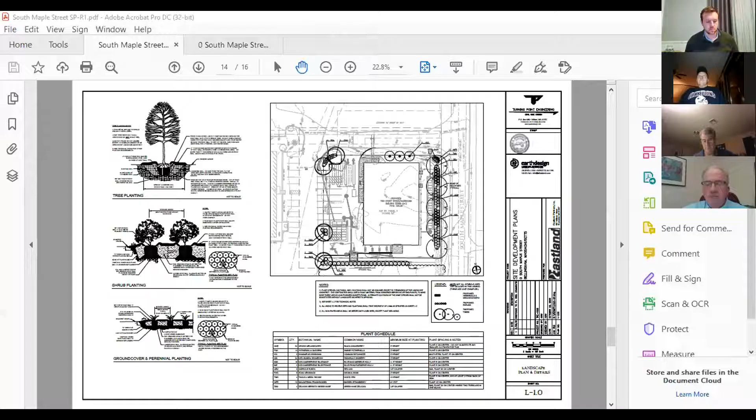Yeah, Stephen, do you have the plan handy? Could you share the screen and walk the board through that? Sure. Okay, everybody see that? I'm just going to go to the layout plan.

It was requested that we consider flipping the building so that this loading area would be on this side of the building. We discussed it with our client, who was opposed to it, but beyond that, we did look at the possibility of doing so.

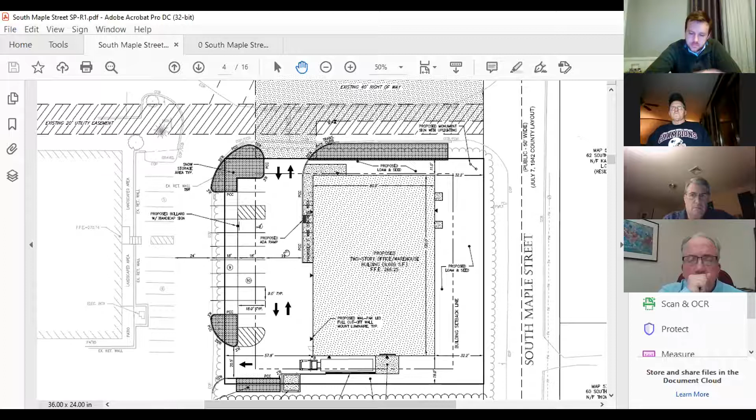And what became a challenge was the turning movements of the truck. So imagine the loading dock on this side of the building, a truck turning in this driveway, pulling up into this other property at 47 South Maple, backing in at a funny angle up to the loading dock. That maneuver was manageable, but then exiting this parked position from the loading platform area became very difficult, because they had to pull up, swing this way out into these parking spaces, swing back this way, and exit out this way, which they're doing now, but from a different position, then pull all the way around and exit. It became a very difficult, very challenging maneuver to make, which had detrimental impacts on other aspects of the site layout.

It was not something we could convince our client to entertain, even though they were opposed from the start. We tried to convince them, let us show you, and then it didn't work. So it was easy to show them that it didn't work.

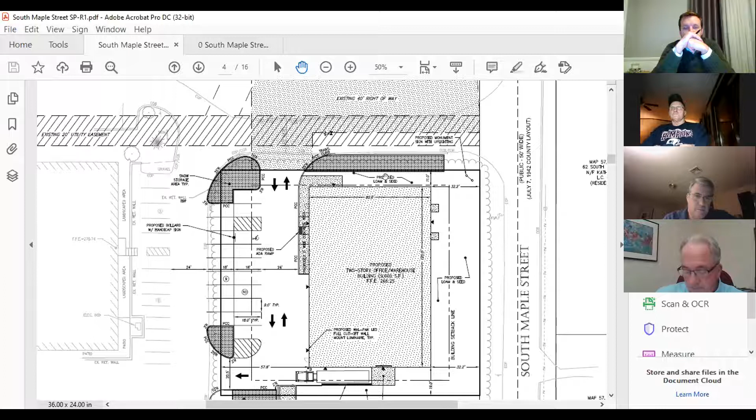We believe that if the loading area was on this end of the building, the visibility of it from South Maple Street and potentially the abutters across the street had way more of an impact on the neighborhood than having it on this side and being heavily screened with landscaping and existing vegetation between the property line and the abutting property line. We felt this was still the best layout.

So I hope that satisfies your understanding of our efforts. Okay, and we'll get back to that as we continue the discussion.

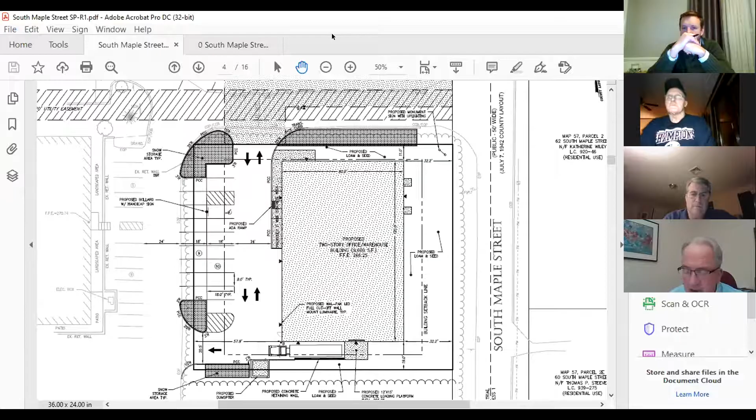Jim, I'd like to talk about - can you address a letter from the Condominium Association? Sure, so I believe the applicant has actually provided a response to that letter. I don't know if you want Stephen to go run through those responses. Could you do the highlights, please?

Stephen? Yes, I'm happy to do so. Let's start with the letter dated - I guess their first letter - just pull that up. Okay, so their first letter was dated January 13th. So we prepared a response letter dated January 29th. I will just start right at the top.

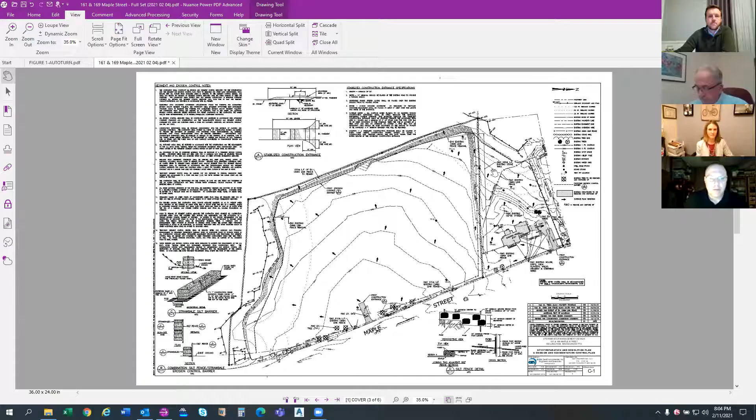Hopefully you're seeing the plan? Not yet. No, nothing yet. All right. How about now? Yes. All right, fantastic.

One of the things that was requested was for us to show existing trees along Maple Street. There were a few missing from our plan set. These trees added along the frontage are existing trees that need to come out as part of the project improvements.

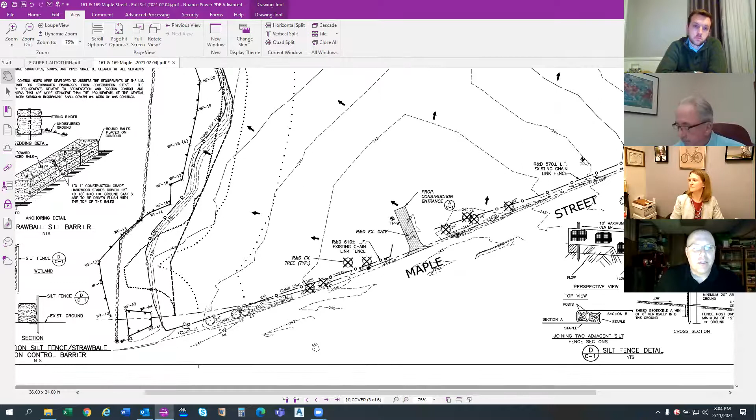The landscaping additions that Kim had mentioned are along this southern property boundary and are shown on this plan here. My apologies, my computer fan tends to run when I'm doing graphics work, and I've been told it's pretty obnoxious, but there's unfortunately nothing I can do about it.

So my apologies for the interference with the sound. But here where the plantings are located, there's a planting list, I believe in the upper portion here, that discusses the plants that are proposed.

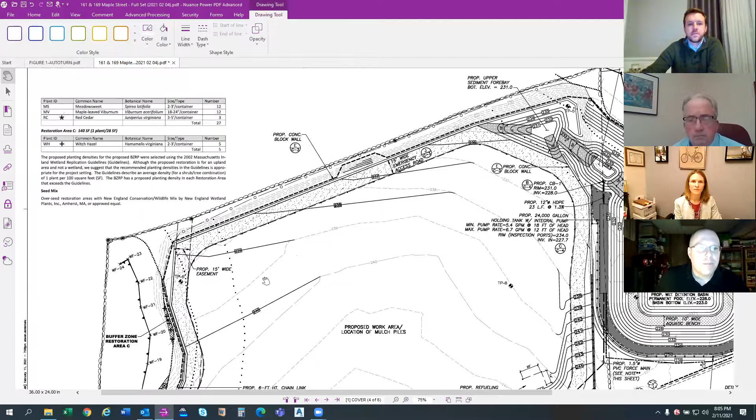One of the other things that— Real quick Steve, I just wanted to clarify, so these are the plantings that are required by conservation for replication of the disturbance of the wetlands, correct? That's correct. Okay, thank you.

Additionally, we had mentioned the proposed easement. So that easement to be granted to the town will run along the southern boundary within the proposed access road, and it extends out to Maple Street.

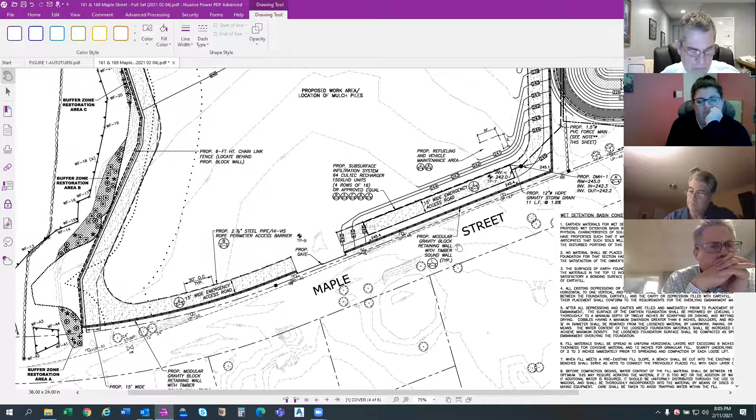The other thing that we now show in the plans is we call out a timber sound wall on top of the block retaining wall along Maple Street. And there's a detail on the next page that describes what that wall will look like.

So here's your modular gravity block retaining wall. On top of that will be a wooden sound wall. The heights of both of these will vary, but the overall height is proposed to be 8 feet.

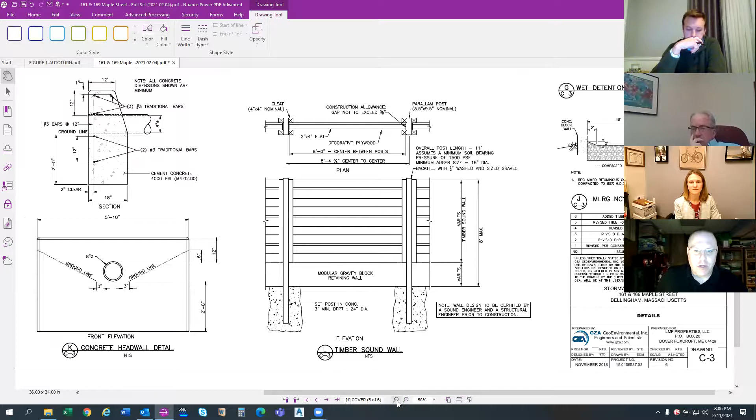Really, there's not much more to show on these plans. Those are the main additions that we made. I'm happy to go over any other aspects of it if the board would like.

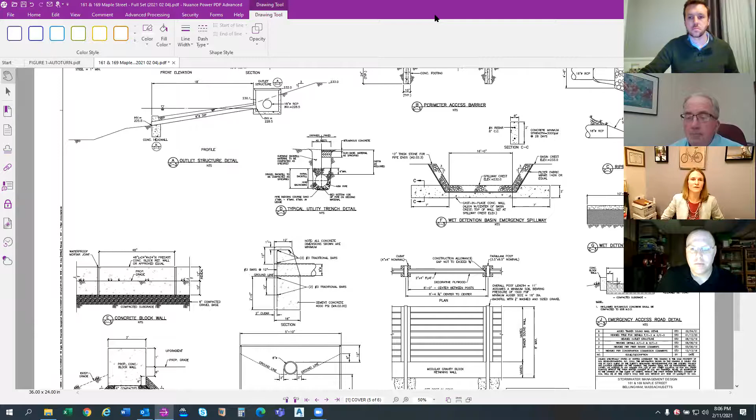I think we may have some questions after we hear from board members. Steve, anything else you, Kim? No, that's it for me for now. Thank you. What I'd like to do now is open up to the board. Brian?

Yeah, so a couple things. I live roughly about a mile or so away from the facility, maybe a little bit further, and so I drive by quite often. I'm very familiar with the site, the operations of the site, the vehicles entering and leaving, the trucks, and things like that, just from living next to it for 12 years now.

So I have a lot of questions and some concerns regarding some of the statements relating to noise, and perhaps that's something that a sound study would help us better understand. I would suggest that the noise study needs to occur at a time when the facility is operating, that's grinding of the wood, because oftentimes I think some of the function of the site, and I could be wrong—

—but some of the function of the site is largely just storage and allowing the mulch to compost and become mulch that we buy at stores. So I know for a fact that I would drive by the site and there would be grinding going on. It's quite loud, and I would get to my house, probably about a mile away, and I could still hear it.